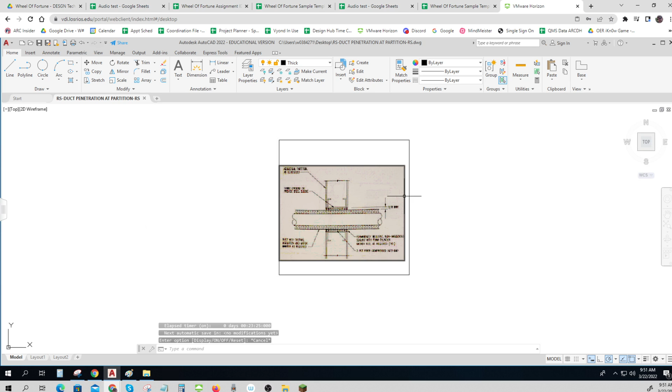Here I have brought in one of the images. I took a snip and rotated it in the snip, then placed it into AutoCAD and traced over it, and I got this. This was just the insulation batting that you already know, but you could draw that on your own.

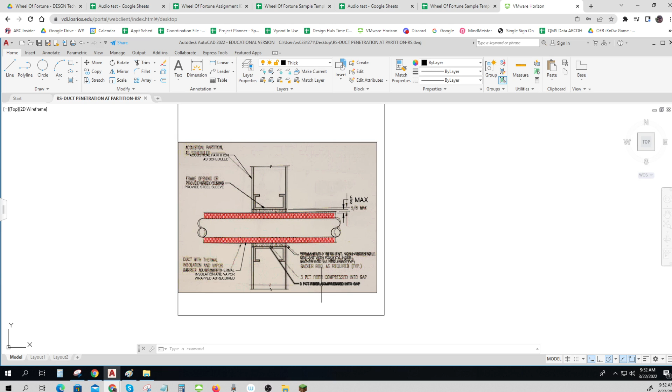I didn't do it exactly, but it's close, pretty close to what it is. So if I delete that image, that's pretty much what it should look like. It looks like I'm missing one line here.

Let me go ahead and get this line, just to get it looking a little bit better.

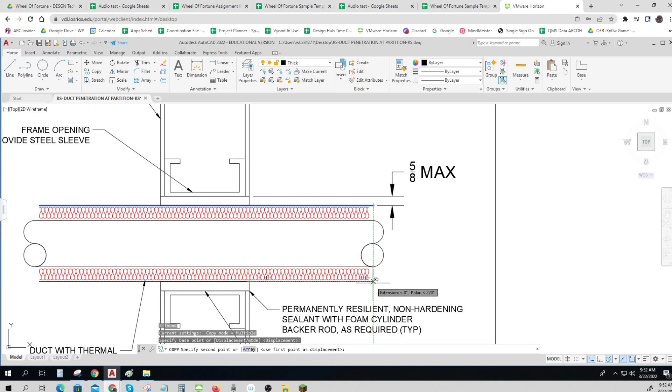So it takes some time to get this as good as you can get it. There we go. I think I erased an extra piece as I went, but you can see this is in an 8x8 box, 8 inch by 8 inch box, and this all fits. It looks okay, and I've got most of the stuff.

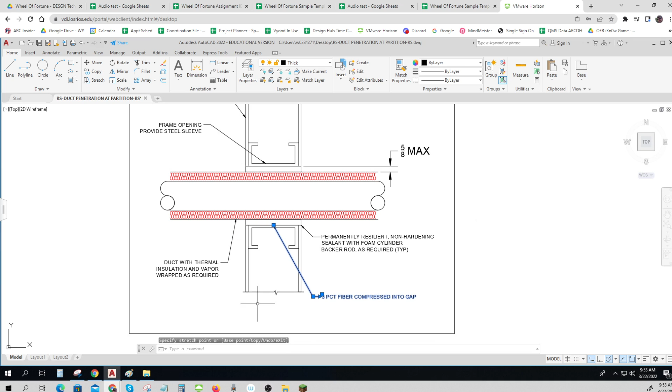This looks a little crummy here. You might want to do a little bit of adjustment here and there to make it look as good as you can possibly make it. But there we go, and it is in model space.

Now let me turn my line weights back. Ooh, that's not so good. So I may need to get some layer adjustments done. So I'm just going to adjust a couple of these.

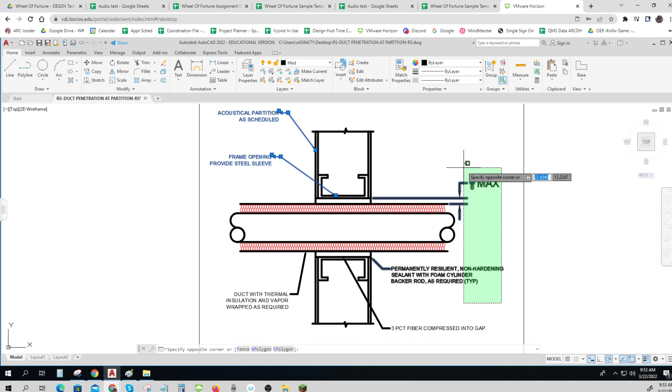Those ones should probably be on medium. Sure. And even medium might be, of what I've got it as, might be a little bit too much. I might need to go to thin for those to get them to look a little bit better.

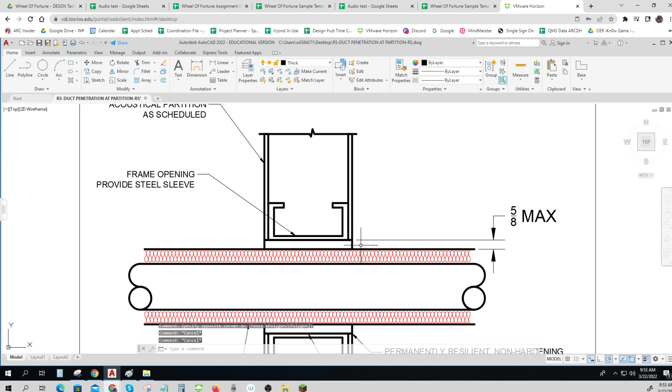That looks better. And then these ones I'm going to suspect. Let me go that way with it and get those ones onto medium.

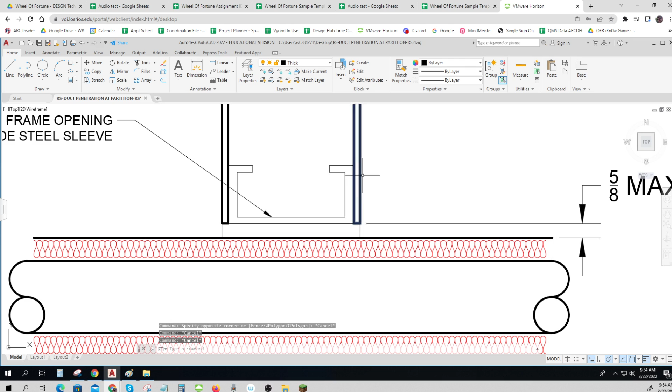And when you put it into Revit, maybe all these need to be on medium. I might just have my thick a little too heavy.

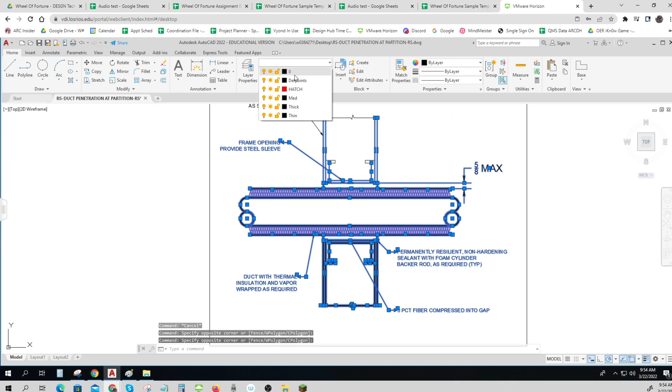You're going to have to go back and check this out when you get it all said and done in your Revit. You may have to come back here and fix these line weights in this realm. There we go, so I've got it.

I'm going to leave this on there just so that I can get my size right as I go. So I've saved this, and I'll put it in my Google Drive, and I've saved it on my desktop, and I've saved it in my drive. There we go, I've got it, and it is called the duct penetration at partition.

And if I look and see how much time I've spent so far on it, I've spent about 26 minutes. And of course, that was partly my setup and partly bringing things in. So 4 of these ought to take you somewhere around 2 to 2.5 hours to get done.

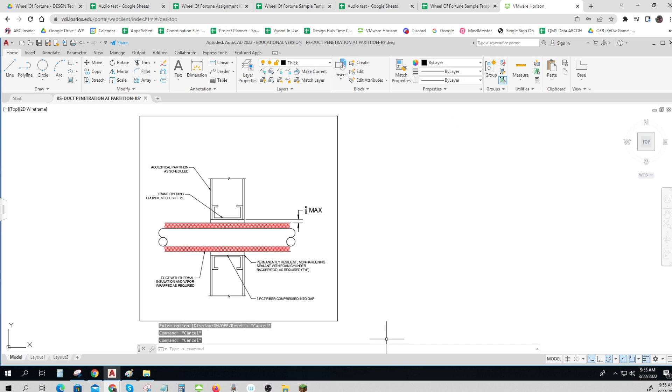Okay, so there we go. And this one's a fairly complex one. So that's how you get started on doing one of these. There it is in AutoCAD.